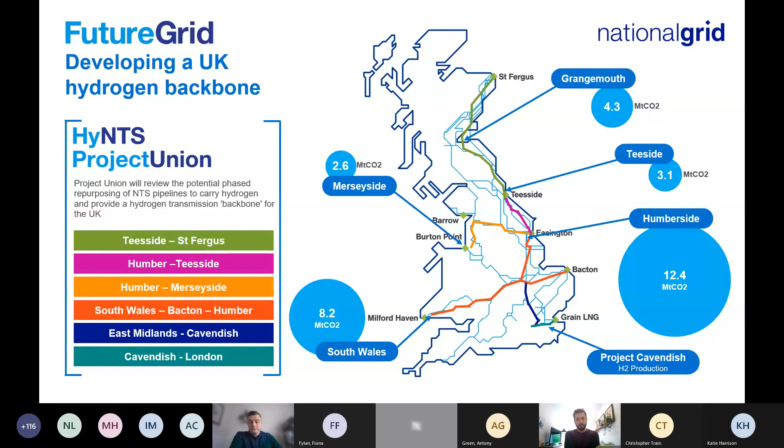So on the European hydrogen backbone, this has been a very big project looking at the whole of Western Europe. Because Brexit or no, we are still quite closely tied into the European energy market. We've got interconnectors that transport gas across the channel, so it's important for us to stay connected to these operators. This project was looking at how do we use the existing transmission system and perhaps create new pipelines where necessary to create a hydrogen backbone for Europe as a whole. It's looking at a pipeline network of almost 40,000 kilometers by 2040, the majority of which, around 2/3, would be conversion of existing pipelines, with an additional 31% of the network being made up of new pipelines. The estimated cost is in the region of 40 to 80 billion euros.

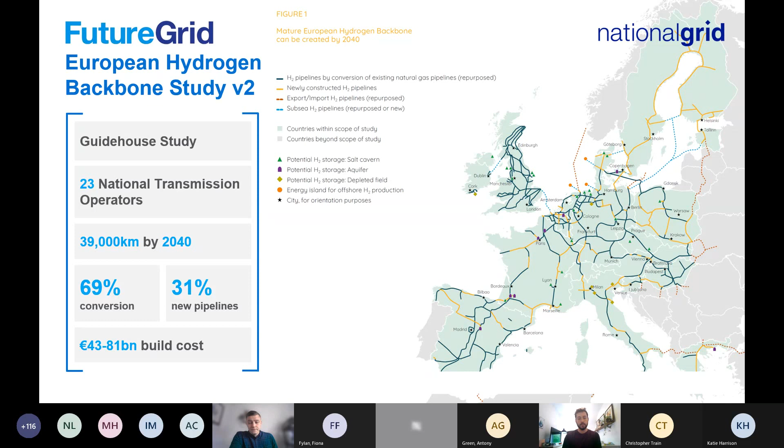So just thinking about some of the challenges we have looking at the existing asset base, whilst hydrogen is very similar in many ways, it's a colourless, odourless, flammable gas. There are some key differences which introduce some challenges when transporting it through a high pressure transmission system.

So one of the first ones we looked at was material compatibility, and whether the hydrogen impact on our steels is going to be a serious issue. We assessed this in collaboration with the Health and Safety Executive, and it's still a concern, but our initial concerns that it would write off the transmission system were unfounded, and there aren't any key blockers. We're going to keep doing materials research going forward, but it's looking promising that the network will be compatible. We have to build up our evidence base, because a lot of the risk management on the network at the moment is made up of decades of experience within oil and gas networks, and all of the safety records that have come from operating these systems for many years. So we need to build up an evidence base which is going to allow us to get to a similar level of confidence with our assets.

We have to look at asset compatibility, because as I mentioned, hydrogen has some different properties, which mean some of the key assets that are on the network, things like regulators, valves, etc., may not perform in a similar way with hydrogen as they do with natural gas, and that's one of the key focuses of future grids, which you'll hear about in a moment.

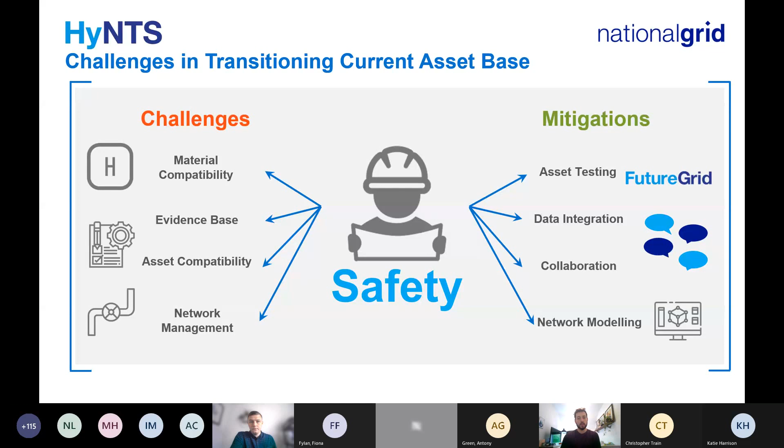We've been engaging with OEMs and our suppliers to understand what knowledge they have on compatibility of their assets for hydrogen. We've got H2GAR, which is a working group with 6 different work streams with all the European transmission system operators to share knowledge. Again, targeting RFIs for specific vendors, valve manufacturers, etc., to bring in as much knowledge as we can.

So that's sort of the high level, looking at the transmission system and what hydrogen means for that. I will now pass you on to Sean, who will talk a little bit more in detail about the Future Grid programme and what we're doing there.

Thank you, Lloyd. Yes, and this is where the Future Grid programme comes in. Future Grid will build a hydrogen test facility to demonstrate that the national transmission system can transport hydrogen, and to showcase the capability of our assets to do so. This will help close the gap in our knowledge that Lloyd was just talking about.

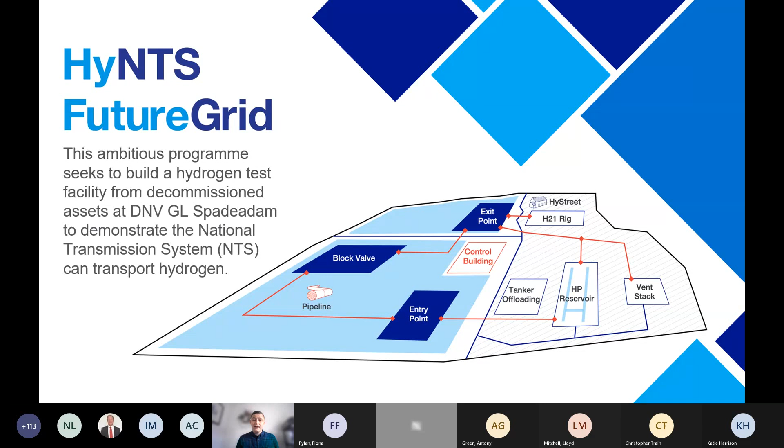This ambitious programme seeks to build a hydrogen test facility using decommissioned assets, putting them all together at DNV's Spadeadam facility, where extensive pipeline research has been carried out over the last 40 years. It's a world-class facility for carrying out this kind of research.

The Future Grid test facility will connect to the H21 distribution facility, creating a representative UK hydrogen testing and training facility. As you can see on the slide, there are some key statistics regarding the project.

Key to the Future Grid project is working collaboratively with our project partners, who I'll give you a bit of an overview about now. DNV are our main partner, responsible for building the test facility and developing the comprehensive master test plan, which we're using to test across the range of decommissioned assets that we will be repurposing at Future Grid.

We are also working with the HSE Science Division, who are supporting the development of the test facility and will also be providing independent technical assistance and validation across the project.

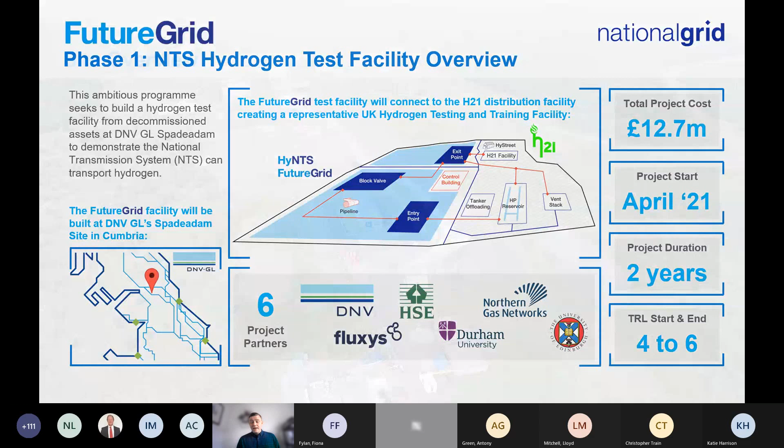Future Grid will be built with existing national transmission system assets, which are being decommissioned and repurposed from across the country, to ensure we're providing a representative model of the national transmission system. So we're not looking to use new assets - we want to use our existing assets because we're seeking to transition and convert our existing network to use hydrogen.

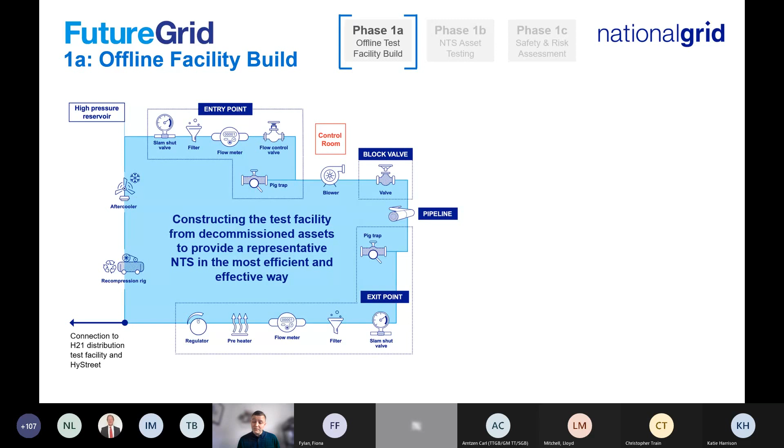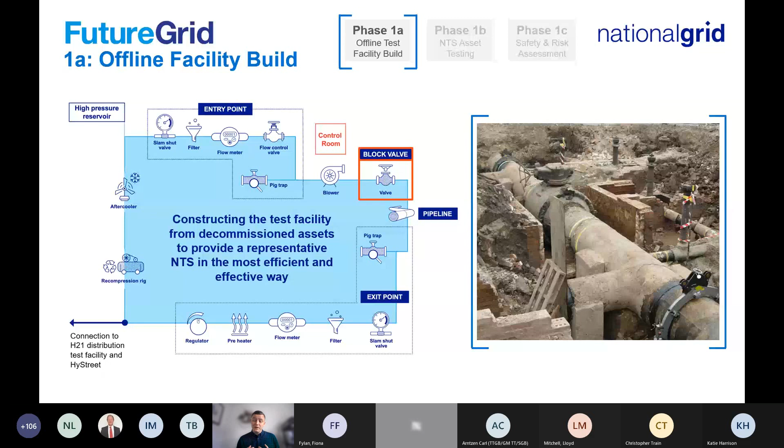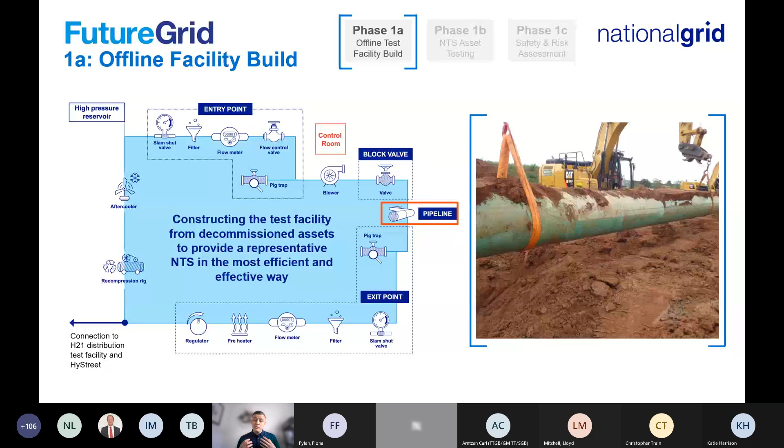We will be modelling various different parts of the national transmission system with the Future Grid facility, including an entry point, so where the gas comes in at a terminal, a block valve facility, which is where we would carry out an isolation of the pipeline when required. We'll be testing pipeline assets, trying to gain an understanding of what impact hydrogen has upon our pipe materials, and more importantly, what sort of interaction it has with the welds, which is a key asset on our system. We will also be modelling exit points, which will provide a model of how our customers and distribution networks receive gas from the national transmission system.

Basically, all the decommissioned assets that we're getting from across the national transmission system are all going to be transported to Spadeadam, where they'll be rebuilt and joined together with a couple of connecting pipes and joints, etc., effectively like a giant Meccano set.

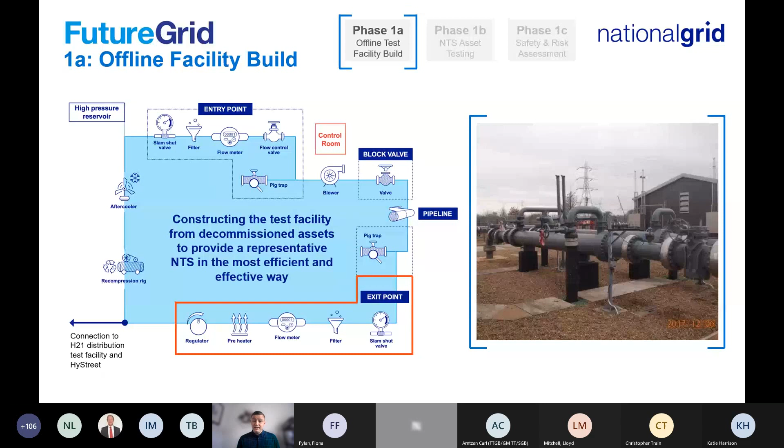So Future Grid will test the national transmission systems at 3 different concentrations. Firstly, we will test a 2% hydrogen in natural gas concentration, and the reason for this is 2% is the amount of hydrogen in natural gas at which we believe it starts to have some sort of different interaction with our national transmission system materials, and effects such as the permeation of hydrogen start to come into play.

Next, we'll be testing at a 20% hydrogen in natural gas blend, which is the level at which we believe current domestic appliances and boilers can operate without any major need for changes to be carried out. And finally, we'll be testing at 100% hydrogen, which is the amount of hydrogen we need to ensure we meet our net zero goal.

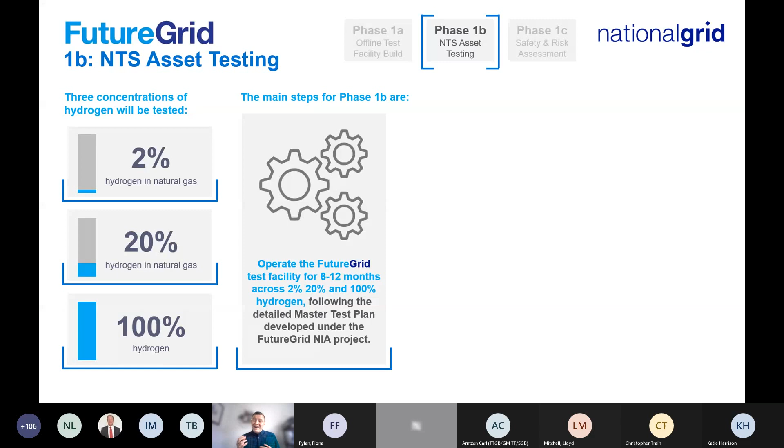Throughout these 3 different concentrations of hydrogen, we will be operating the Future Grid facility for between 6 to 12 months across these different concentrations, following a detailed master test plan, which has specific tests to test the functionality and integrity of the various assets forming part of the Future Grid site.

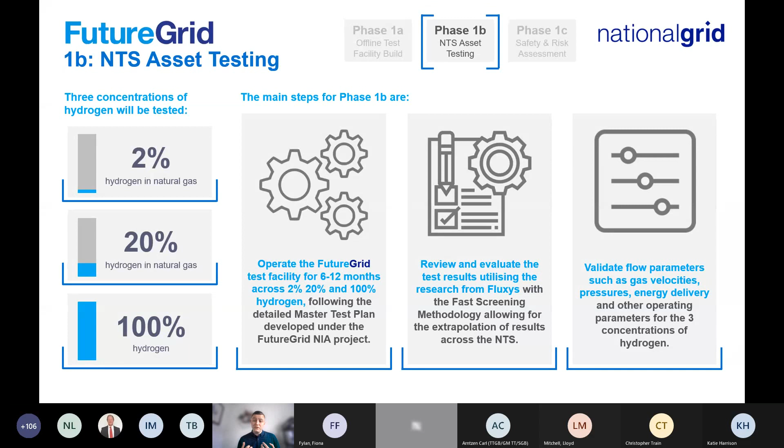We will then review and evaluate the test results, and also use research from our project partner Fluxys and extrapolate some of this data, so we've effectively got results across the national transmission system. Then, working with our operational engineers from the control room, the people who make sure gas gets moved around to the right part of the country as part of their day job, they will help us validate the flow parameters from our hydrogen model, and look at key areas such as gas velocities, pressures, and energy delivery that we need to consider for a future conversion to hydrogen.

The testing and research being carried out as part of the first phase of the Future Grid project will help develop and further mature National Grid's and the general industry's knowledge, in terms of what we need to do to ensure a safe and resilient hydrogen network in the future. There are 3 key areas that we will be further informing as part of this research work.

Firstly, we will look at the hazard assessment of a transmission system and consider it based on a network transporting hydrogen instead of natural gas, trying to understand what sort of impact that has on the societal risk of our pipelines. Next, we'll also consider the quantitative risk assessment, and whether we need to make any sort of deviations for our assets being used to transport hydrogen instead of natural gas.

Finally, we'll also consider whether we need to make any adaptation or changes to our overpressure risk methodology, which is important for risk analysis and emergency planning. These 3 key areas will then all feed into National Grid's safety case, which encompasses our policies, procedures and work instructions, and identify an overall understanding of what the impact of operating with hydrogen would be upon our network.

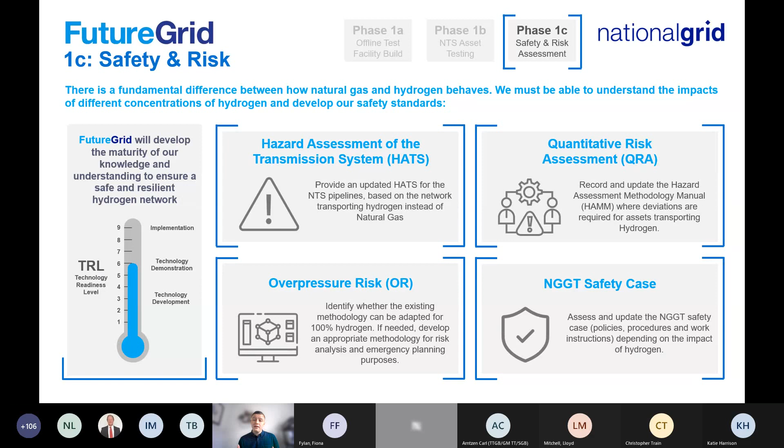So far today, I've talked you through phase 1 of Future Grid, which is to demonstrate that the national transmission system can transport hydrogen and also showcase the capability of some of our assets. Obviously, this is just the first phase of a wider programme. The intention is for this programme and the Future Grid site at Spadeadam to continue to increase in scale and ambition as we progress.

In phase 2, we will be looking at installing more complicated technology such as compressors, which are critical for the operation of the national transmission system, as well as considering trial and deblending technologies, which will also be very, very critical in terms of how we would convert to either a blended hydrogen network or a 100% hydrogen network. Finally, in phase 3 of the Future Grid programme, we will work with third parties to test new technology at the site, and work closely with suppliers to try and develop new solutions and new assets.

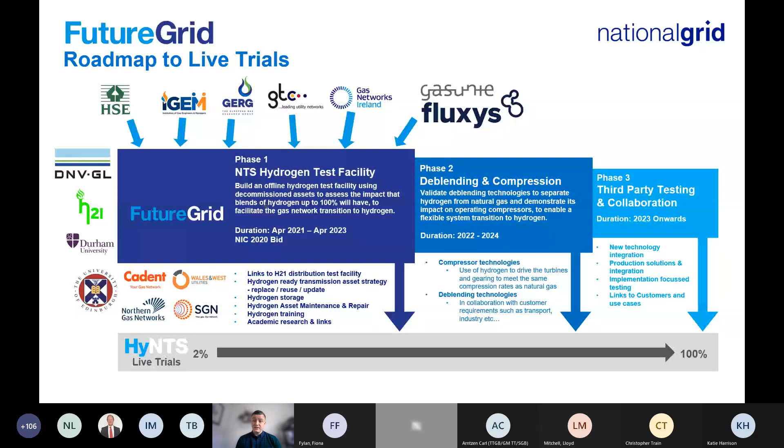This also feeds back into what Lloyd was discussing earlier. As part of the Future Grid programme, we will be reviewing and testing our assets to get data about how they operate with hydrogen. We'll use that data to build a more informed model of the national transmission system to understand the impact of operating hydrogen, and what further research would be needed to help us reach net zero. It'll then feed into building a hydrogen backbone linking the various industrial clusters. Most importantly, it all comes back to collaboration with wider industry groups, customers, and key stakeholders, working together on this journey to net zero.

And that's everything. Thank you.

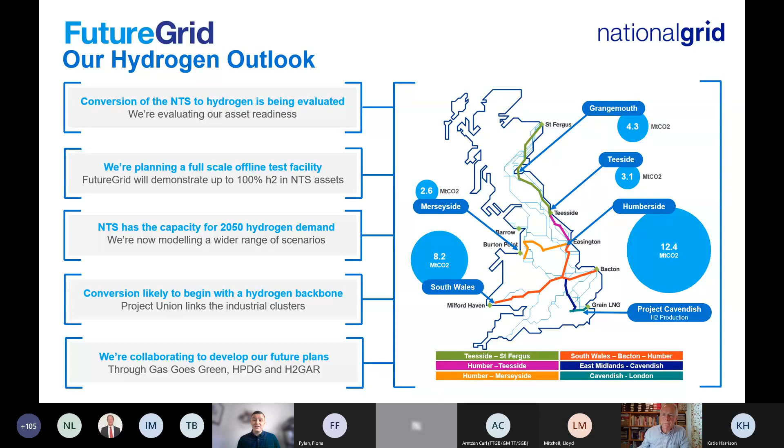Thank you very much, Sean, and thank you very much, Lloyd. One of the early questions in the chat box was around compression and compressors. You might have covered this in one of your later slides, Sean, but the concern raised was, aren't there bigger issues around repurposing compression than there are around repurposing the pipes?

I can pick this up if you like, Sean. It depends - there are twofold issues with compressors, because you've got the gas supply to actually drive the engine. A lot of our engines are gas generators for the turbines, so you've got to think about the fuel supply. Luckily there's a lot of work going on within turbine manufacturers such as Siemens, who see hydrogen as a large market. They've produced a graphic showing the compatibility of their existing fleet, and a number of existing units are already compatible with hydrogen - some of the newer ones - and many are compatible with hydrogen blends. We do have an asset replacement programme for compressors, so it's a similar issue to the boilers in terms of making sure what we're replacing now is ready for the future. Then the other side is the actual compression.

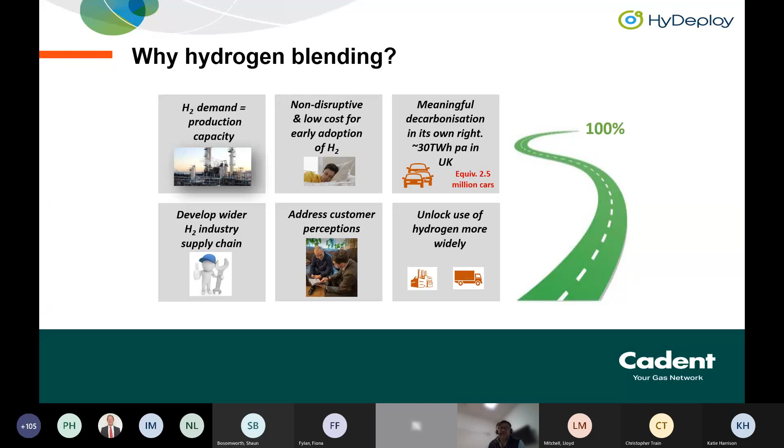And then lastly, it can unlock the use of hydrogen more widely, particularly in transport is the obvious place. And Chris, you mentioned that earlier, as others have, in terms of where hydrogen can be used for, in cars or rail or wherever else, and we could obviously get hydrogen refueling facilities as part of it.

And I think the last thing before I hand over is that pathway to 100% hydrogen down the track. If we can start to get it used and get it accepted, then it is the pathway to the future. So at that point, I'll hand on to James, who will go through a bit more of the detail on HyDeploy.

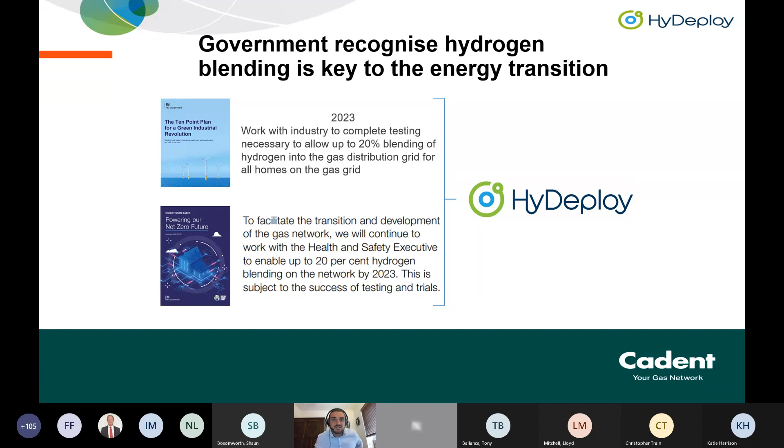So the HyDeploy programme is being led by a consortium of partners. We've got Cadent collaborating with Northern Gas Networks, who you'll hear from later today, and also Progressive Energy and others. And Tommy will also, from Progressive, do a piece later today. The objective of the programme is clear, and it's to establish that a blend of hydrogen and natural gas can be distributed and utilised safely and efficiently across the UK gas distribution networks without disruptive changes to consumers. That's highlighting the point that Tony just made around the success of the Keele University trial, not impacting domestic users that were involved in that trial.

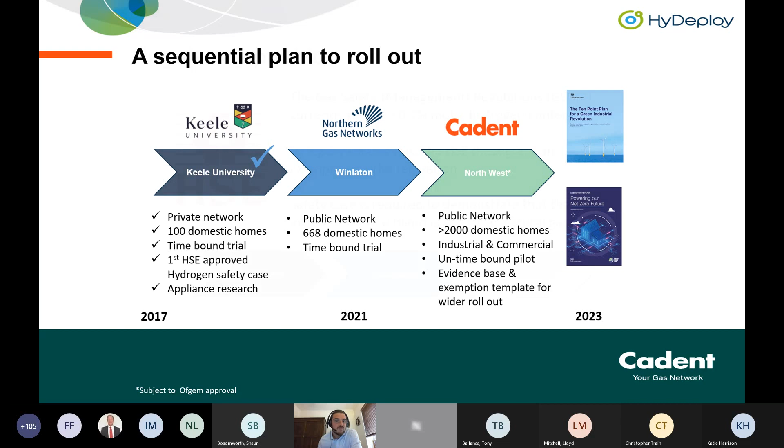So just one point to make around the regulatory position. Currently, the gas safety management regs only permit 0.1% of hydrogen in the gas stream. To legally exceed this, the Health and Safety Executive must grant an exemption to the regulations, and therefore a safety case is required to demonstrate that a hydrogen blend is as safe as natural gas to use and consumers aren't at risk.

So I'll now pass over to Tommy, who will talk us through how we go about creating the evidence to build the safety case. Thank you.

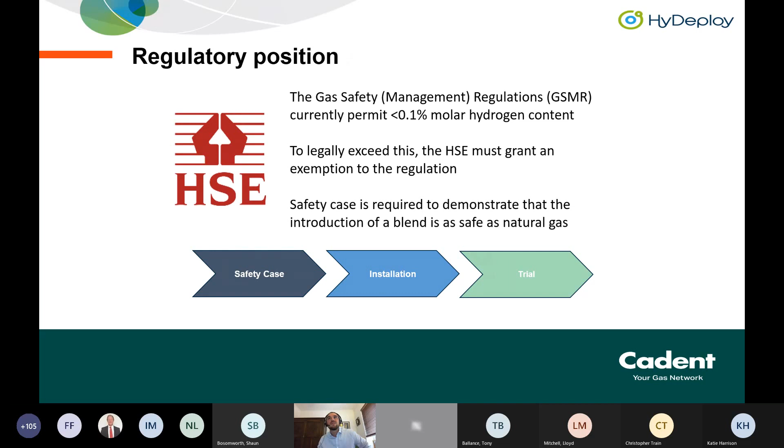Thanks, James. I assume you can all hear me, but please shout if you can't. So the next couple of slides, I'm going to outline the structure of the safety case that was developed, one to support the Keele safety case exemption, but also to support the Winlaton exemption to GSMR, and will ultimately be the structure of safety case that will be presented to support the wider rollout.

So this slide tries to summarise what is sort of a multi-million-pound programme over many years in one slide. In effect, the safety case rests upon four key areas. You have the research associated with appliances, for both their short-term and long-term safety and performance. There is the research associated with materials and assets, looking end-to-end from the point of injection through to the point of use to make sure they are compatible with hydrogen blend.

Then there is the more fundamental gas characteristics research, which is to understand how the underlying physics of a hydrogen blend differ to natural gas. And then that supports the final stage, which is the procedures and gas detection, which is largely where all of that research comes together and forms very practical outputs.

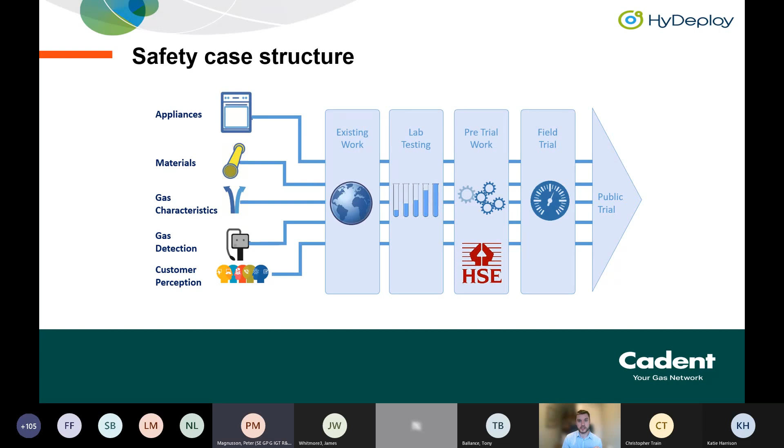What I'm going to do now in the next couple of slides is just go into a bit more detail on the key technical areas and draw out some of the key results from those areas.

So the first one is appliances. Appliances has really been the foundational rock, if you like, of the safety case, because this is the sharp end of risk. The current risk profile today within the gas network, from our use of gas, is that about 80% of the individual risk is associated with appliances, basically CO poisoning, and the remaining 20% is associated with fire and explosion from leakage. So understanding how a blend might impact the safety profile of appliance performance is absolutely critical.

So in the top right, I've just got a couple of standout photos just to demonstrate that from a visibility perspective, the flames really don't look any different. I'm sure I could have flipped the naming of the images and people would have believed it as well. Normally we run this test at conferences, and people can't normally tell the difference between the two flames. And clearly the one on the right has nearly 30% hydrogen.

So the appliance work within the HyDeploy and HyDeploy 2 program has created a generic evidence base for all domestic appliances within the UK dating back to 1976, which is when the first natural gas standards came into force following the conversion from town gas.

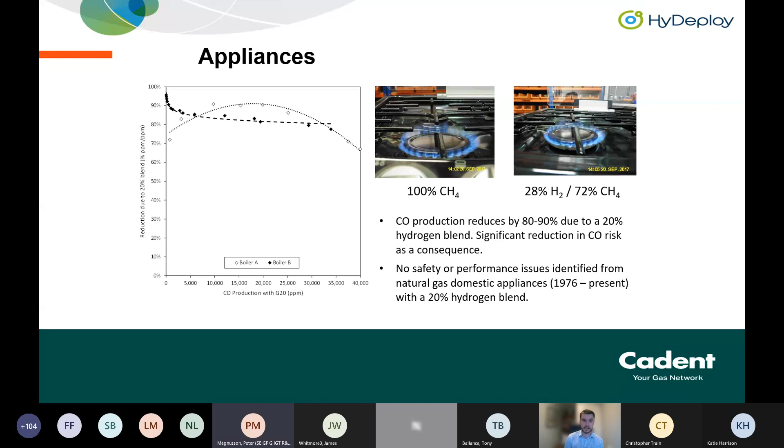Here are some images of our material testing program. The process we went through to assess materials was to do a very comprehensive asset survey. For the Keele safety case, this consisted of identifying around 2,000 assets, where we broke them down into their subcomponents and then their individual materials of construction.

We then developed an experimental program to soak them in hydrogen gas and then test their mechanical properties. We decided to use experimental conditions far above what we would see in the field trials, so we were testing samples at 8 bar pure hydrogen relative to the 20% that would be used during the trials.

Following this saturation process, we then mechanically tested them and inspected the fracture surface to see if there was any evidence of hydrogen permeation and any detrimental impact upon the materials. Broadly speaking, what we found is that across all the materials tested, there was no meaningful change in the mechanical properties, which gave a very solid basis of evidence to demonstrate that the assets exposed to the hydrogen blend would be capable and suitable of being exposed to them.

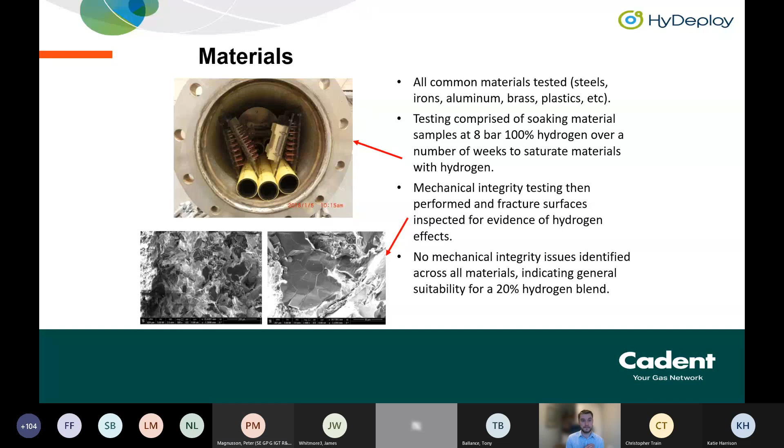Go forward to the next slide. This is a couple of images from our gas characteristics program. The first two on the left are our leakage assessment, and the right is our consequences assessment. Clearly leakage, ignition, and consequences are a key element of understanding risk.

The way in which gas leaks in the real world is far more complex than a short analysis would imply. You have lots of competing factors, and trying to understand the net effect of leakage requires some dedicated experimentation and some quite complex simulation. So that's exactly what we did.

We used this facility on the left-hand side at HSL in Buxton, which is a controlled wind tunnel, effectively, where you have a box inside a box. In the smaller box we can release leaks in proportion to the size of the room, at different gas pressures and across different leak holes. Then we can control the wind that goes over the box, so we can control the external wind conditions.

We undertook a series of tests, and then simulated all of them using a CFD model that we created of the facility, which is the middle picture. We then created a simplified model that was validated against both the experimentation and the CFD, which allowed us to undertake Monte Carlo analysis on that simplified model, putting in all the real world variability you'd see in wind conditions, leak sizes, etc., to understand the overall effect of the blend on leakage characteristics.

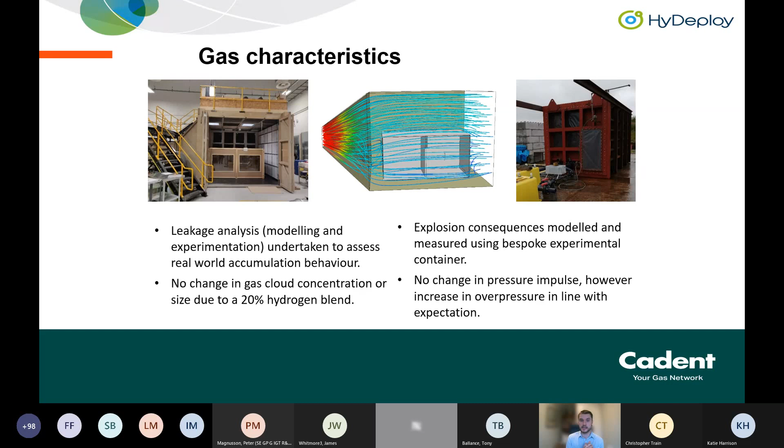There's clearly lots of other work that we can go into, but there are a couple of highlights. If we go on to the next slide.

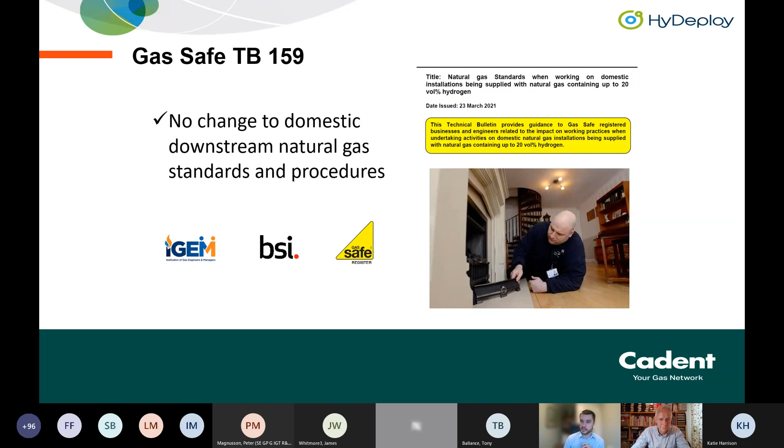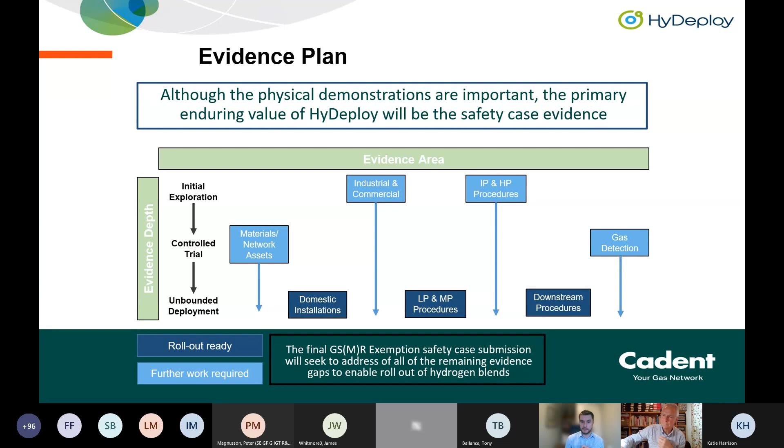And that's the end of my slides.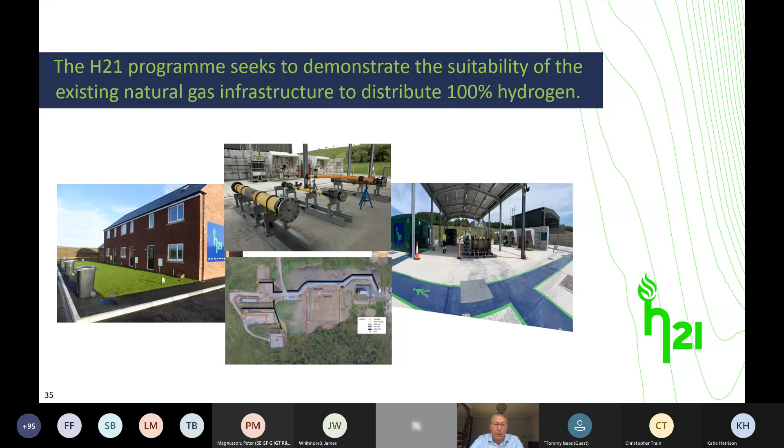I'm really proud to be part of the H21 programme. We've been going for about 4 years now, and they've done really good in-depth research into the safety case for 100% hydrogen, trying to demonstrate that we can operate gas distribution networks on 100%. The research is going really well on a number of different fronts, which I'm going to come on and talk about over the next coming slides. Thanks, Kate. Could you flick on to the next slide for us, please?

The testing in Phase 1 has been in two different areas. One is the HSE's Science Division at Buxton in Derbyshire, where we did a lot of leakage testing. We removed hundreds and hundreds of assets from the gas distribution network, which were being removed as part of the iron mains replacement programme. For those who don't know, we've got a 30-year programme to replace iron mains within 30 metres of property with yellow plastic pipes. We took advantage of those assets being removed to take them out safely and transport them to the HSE's lab in Buxton, where you can see in the photograph we set up a testing rig.

We tested them on natural gas, and then we tested them on hydrogen to compare leakage, to see if any assets leaked on hydrogen that didn't leak on natural gas, and whether the leakage rates were any different. The great news from that research is we didn't find any assets that leaked on hydrogen that didn't leak on natural gas. We also calculated the leakage rates for natural gas versus hydrogen, and again the actual rates recorded were in line with the predictions and modelling done by the scientists at HSE. So again, really good news - nothing that caused us any concern, nothing we didn't expect to see, which was really good.

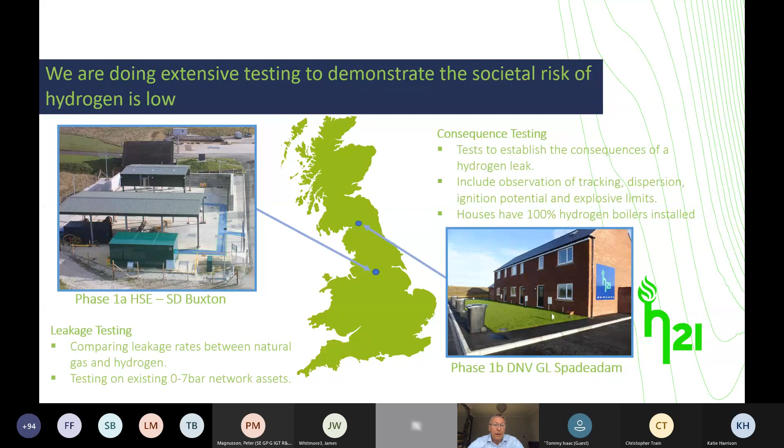Subsequent to a lot of the testing being completed in the high street, we've now introduced 100% hydrogen boilers inside the houses, and we're doing more tests with BEIS, looking at things that go on inside the home as well. Those assets will continue to be used as we go forward, and they will form part of the phase 2 programme, but also part of the future grid as well with National Grid. So it's all coming together really as a fantastic asset for the gas industry and a great research facility at Spadeadam.

To offset the research on the safety impacts of hydrogen, it's very important that we also look at the social impact of it, the society and social acceptance. We've done a lot of work with Leeds Beckett University, and Fiona, who was on the panel earlier, is heading that up. We've done lots of different workshops. We've looked at the perception of hydrogen, what people understand about decarbonisation and making the world a safer, greener place to live in. Some of the terminology and how we couch the language when we talk to customers, what they understand and what they don't understand. Really interesting, in-depth research that is continuing as part of phase 2 as well.

The main findings were that cost and disruption are the big things that customers don't want, which, going back to the conversations earlier about being able to replace a boiler with something that's hydrogen ready, is very low cost, low disruption compared to, say, a heat pump or all electrification of homes. So we feel that this is a great counterbalance to all the research and the safety related aspects that we do, and it continues onwards.

We're now doing research into how we would talk to customers about converting them over to hydrogen. How would we message it? What sort of communication formats do they like? How should we do it, and what language should we use? It's always really good to balance the safety related aspects of any research with the ongoing social acceptance, which is just as important.

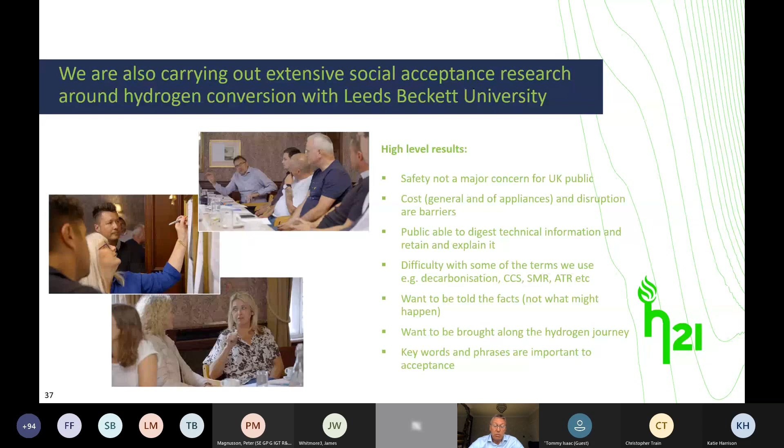At the end of the day, if we prove the safety case for hydrogen, what's really left as a barrier is economics of producing hydrogen at the right price and the social acceptance of hydrogen across the country. So this work is absolutely vital.

Moving on now to some of the findings from our research and our risk assessments that we do as part of our safety case. We've got a fantastic safety record in the gas industry, something that we're really proud of. We've got a 99.99% reliability and resilience of our network, and you're unlikely to have your gas supply interrupted more than once every 140 years, which is an incredible achievement compared to some other industries. We want to try and match up to those same high standards when we move over to hydrogen.

We've demonstrated over the years that we have got good controls and processes in all our policies and procedures and the way that we run our safety cases.

The safety case for hydrogen is underway. We have discussions with the HSEs. We've been going along, this is the end of phase 1. We're actually partway through phase 2 now, and this time next year, the final report for H21, as far as the safety research is concerned, will be published. But at this point in time, we're very confident that the societal risk of hydrogen can be reduced down to as low, if not lower, than natural gas.

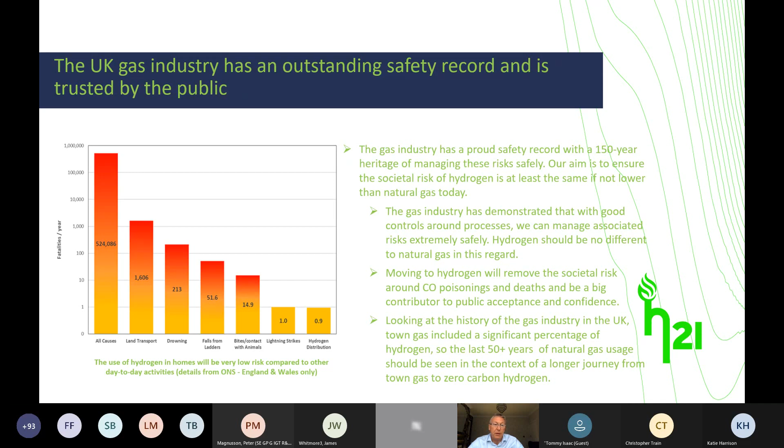I like this slide because it shows the journey of the gas industry from right back at the beginning of its first inception over 200 years ago. For the vast majority of that time, we were producing gas from coal using retorts, and 50% of that was hydrogen. So it's only in recent times, in the 1960s and early 1970s, when we converted over to natural gas, that hydrogen fell away. Over the history of the gas industry, hydrogen has played a big part, and it's only very recently that it's fallen off, and now it's set to make a comeback again. As you can see, the timescales along the bottom are compressed right up.

So we do have a challenge as far as moving the programme forward. We're all really up for it, and we're all really keen to get through this safety phase, demonstrate that we can put hydrogen into our gas networks and do it safely. We can operate our networks with the same level of resilience and safety performance that we've got now, and get the risk to society down as low, if not lower, than it is currently with natural gas.

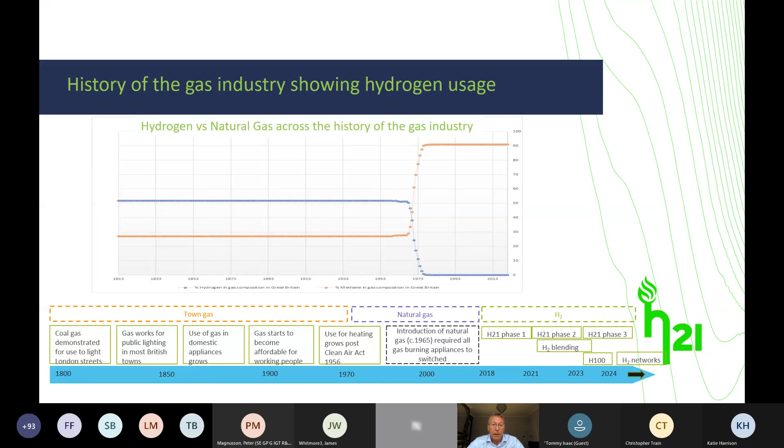And that's what we've been doing over the last 4 years, and we continue to do over the next 12 months or so until we've finished phase 2 of the H21 programme. So if you could do the next slide, please. Katie, thank you.

Some of the potential mitigations that we're looking at that could reduce the societal risk even further are thinking about the completion of the existing iron mains replacement programme, which is set to run for another 11 years. We could potentially do targeted additional iron mains replacement within 30 metres of property that will reduce the risk down even further than it is now, to as low as reasonably practicable.

And you've got to balance up the investment with the sort of return that you're going to get. But we feel really confident that by doing additional mains and service replacement, we can get the risk down lower than it is now in natural gas, which is a fantastic thing. As I've said earlier, the removal of the CO poisonings risk will further reduce the societal risk, which again is a positive. Phase 2, which is underway at the moment, is looking at further risk reduction

measures both upstream and downstream. There's a project sponsored by BEIS called Hy4Heat that's been running for the last few years, and we are going to combine the outputs from their safety case work with our own. We're going to put that together so you've got an end-to-end safety case, not just for gas distribution networks, but downstream of the meter, appliances and things that go on in the home as well.

So overall, you'll be able to present one unified safety case for demonstrating the societal risk right from the end of the transmission system, right through the distribution system, into people's homes and down to appliances, which will be a fantastic thing. We're also working on a number of other positive measures and new innovations, such as hydrogen detectors and smart appliances that could potentially detect if there's any leakage.